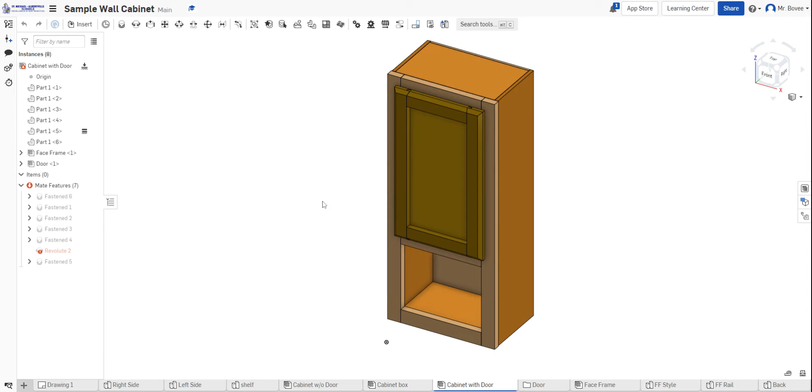Welcome, STMA cabinet makers. This video will show you how to draw the wall cabinet, or at least get started with it. This is the wall cabinet you will build. It's a great little cabinet that can hang on a wall in a bathroom, bedroom, garage, or entryway, and store some of your coolest and most treasured items. So how did we draw this?

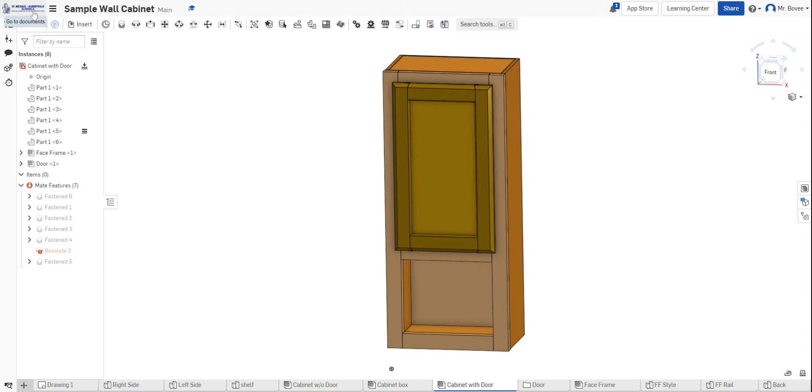Well, first of all, make sure that you already have your STMA account and that you're logged into STMA with your St. Michael-Albertville Schools logo up there. And then simply click on it.

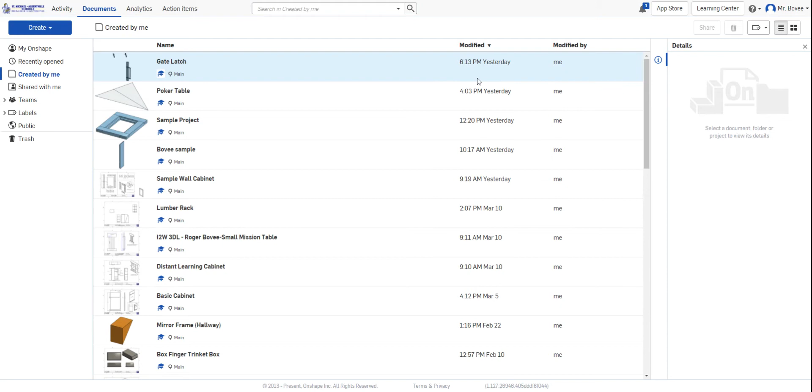Looking for the Documents menu up here, you'll go to Create a New Document. You're only going to do this once for the wall cabinet, so I'm going to name it Wall Cabinet Demo. All right, here comes the project.

When Onshape opens up, you get two little tabs down here. The first one is a Part Studio, which gets you drawing parts. Now you're going to have to access your PDF plans of the wall cabinet.

You're going to be looking for page 2 where they have the sides on there. Let's see here... Nope, all right, sorry, I had a PDF opened and I was going to show you those plans, but you'll be able to find those plans in the Google Classroom where you found this video. So sorry about that little delay there.

All right, so getting started with the wall cabinet. When we get started, we want to start drawing the sides first. And those sides, if we look on the plans, are 7 by 28.

So what we do is we create a sketch, and we get to choose a sketch plane right here. I like to choose one that represents how the part's going to fit in the cabinet. Our sides are going to go up and down, with a left and a right, so I'm going to choose this sketch plane.

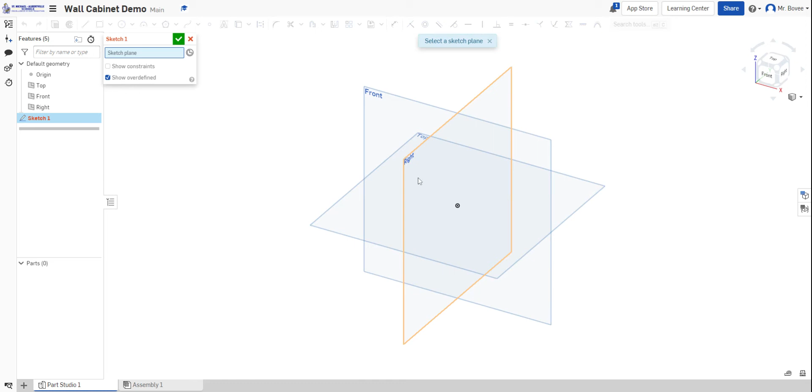It doesn't really matter which one you choose, but it does make it a little bit easier when you get to the assembly stage. I clicked on it, and you'll see I got this little outline. I'll right-click on that and choose View Normal to Sketch Plane.

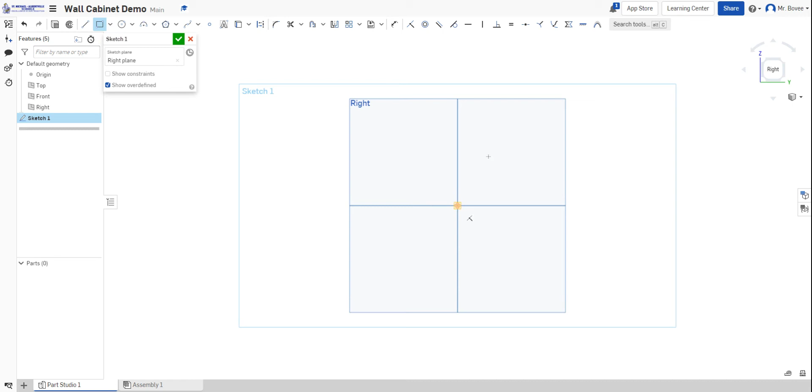Then I'll go up here and grab my rectangle tool. I like to start in the center there, but it doesn't really matter. I'll just draw a rough rectangle with this box around it right here.

That tells me I can put in a number, so I'll go ahead and put in 7 inches and hit Enter, then 28 inches for the height of this piece, and hit Enter as well. So now I've got the rectangle drawn for my side.

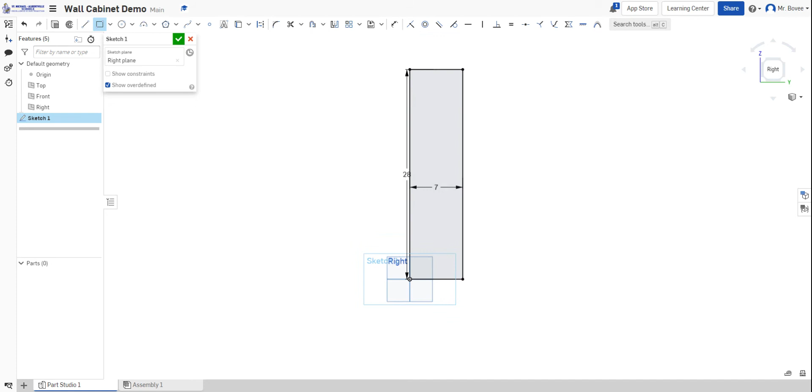I will approve of this sketch by clicking on that green arrow, and I'll grab now the Extrude tool. You'll notice these tools all change, so I'm going to go grab the Extrude tool.

I'll click on this rectangle, and I want to rotate it a little bit so you can kind of see what I am doing here. By clicking on it, you can see it got a little thickness to it, and it happens to be a 1-inch thickness.

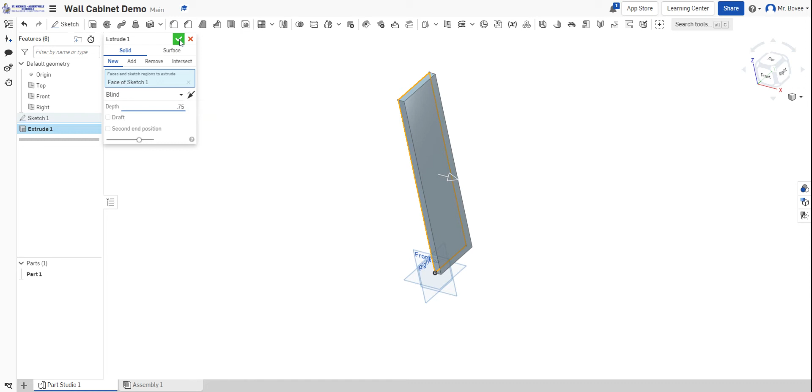I want you to type in 0.75 because it's going to be plywood, and that is the thickness of plywood, 3/4 of an inch. Okay, so there is our piece of plywood.

Now it's time to start putting in the dados where the shelves are going to go. So what we need to do is create another sketch. We'll go up here to Sketch, and we are going to click on this surface because that's where we want to draw.

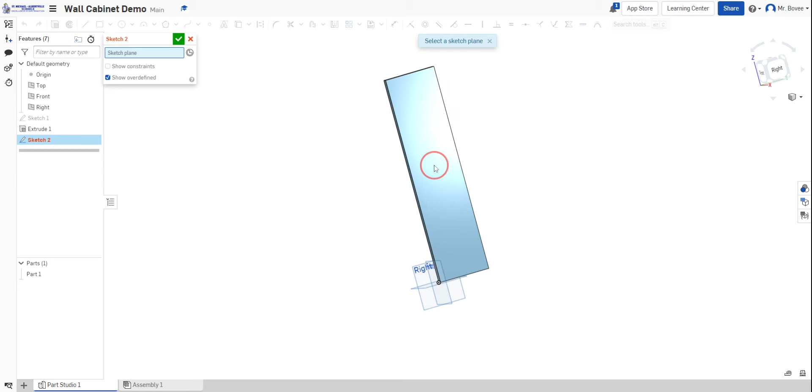So we click on that surface, and you'll see that another sketch plane shows up. I'm going to right-click on that and go View Normal to Sketch Plane. Now I'm going to start drawing on that surface.

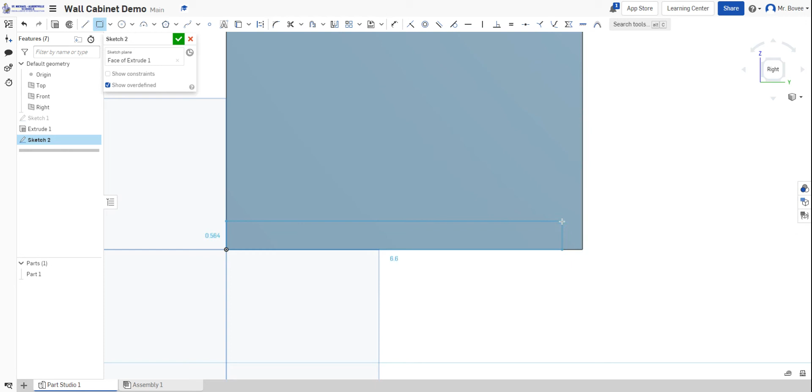I'm going to use my rectangle tool, and I want you to watch closely here—this is going to save you a headache. I'm going to click on this corner, and it's natural to go all the way over to the edge, which is what we'll want in the end. But for some reason, Onshape creates an error when you do that, so don't. Just draw a rectangle right here and click.

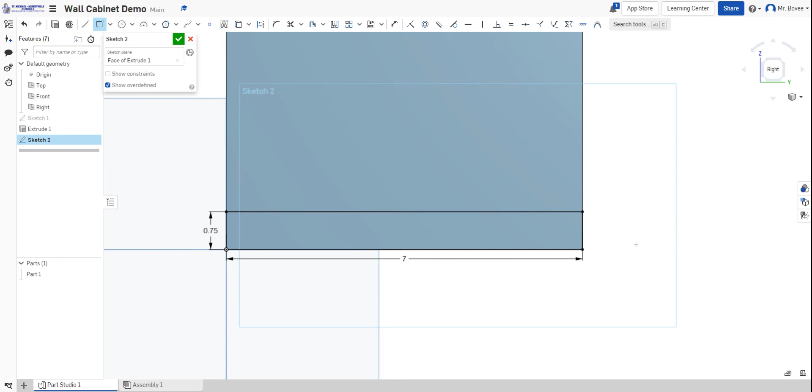Now I know this line is 7 inches, so I'll type in 7 inches and hit Enter. Then this is going to be 3/4 of an inch, so 0.75, and I'll hit Enter. Again, we could have sketched that rectangle all the way to the edge, but it would have given us an error, so by doing it this way, we avoid that.

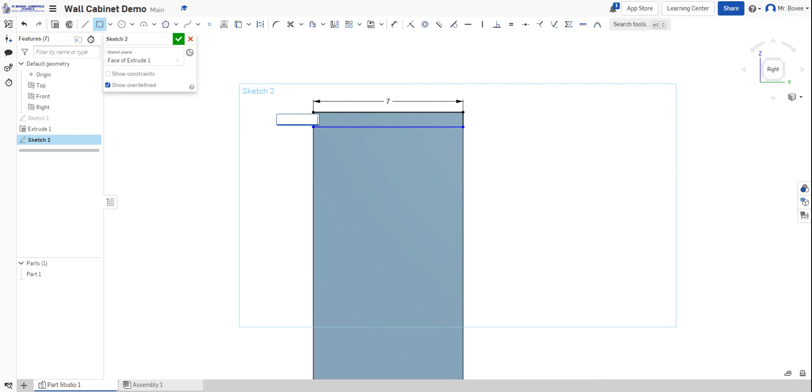Now we're going to put one similar up here on top. I'll do the exact same thing—grab my rectangle tool, grab that corner, and sketch a rectangle. Type in 7, hit enter, type in 0.75, hit enter, and I've got that rectangle. Now I've got to draw another rectangle right in here.

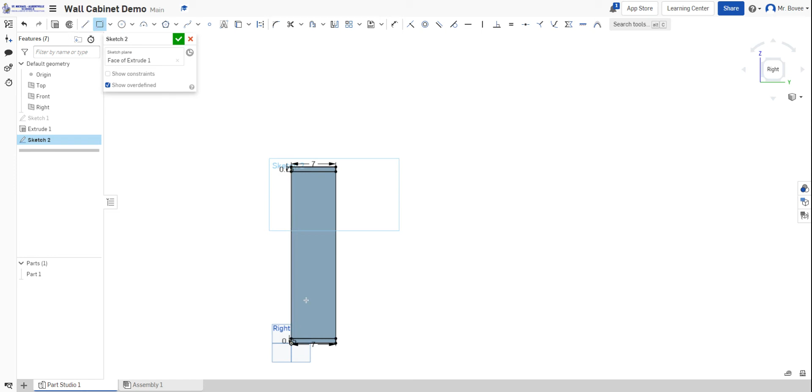So I want to share with you, where do we draw that? Well, we have to come up 9 inches from the bottom here. What we need to do is draw a line up here to give us a point to start that rectangle. Or, you know what else we can do? Let's do it this way—sorry, I just got this idea.

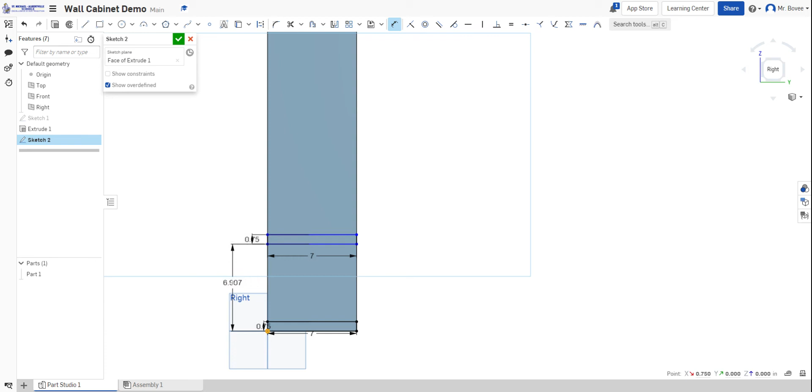We're going to use our rectangle tool and draw our rectangle just like before, making it 7, hit enter, then 0.75, hit enter. Now what we need is for this dot to be 9 inches from that dot right there. We're going to grab this dimension tool, click on that dot, click on that dot, pull the dimension out here where I can read it easily, and type in 9 inches. There we go, 9 inches, just like that.

So now I've got my piece right there—I've got my 3 rectangles drawn, and now I'm going to extrude those. But I want to take material away. This is 3/4 of an inch thick, and we want to go halfway. What is half of 3/4? The answer is 3/8, so we want to go 3/8 of an inch into the board.

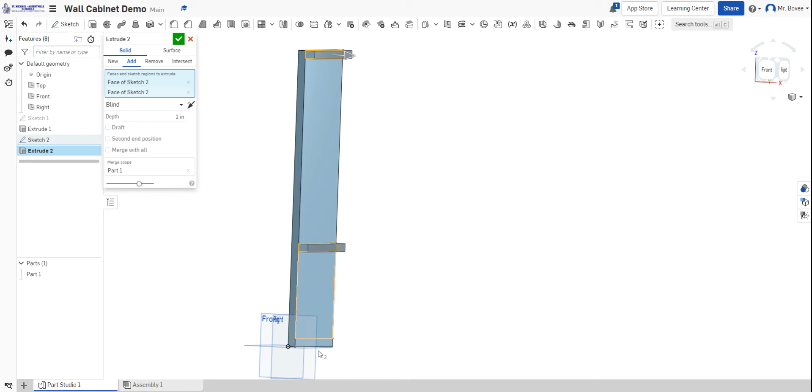I'm going to click on each of these rectangles, and you'll notice they extrude out 1 inch—well, I've got to fix that. I'm going to type in 3/8 of an inch, which I can do as 3 divided by 8, or you can do the decimal, which is 0.375.

Next I'm going to hit remove up here, and you'll notice now they cut the little rabbets out. Just a little fun fact: this is a dado and this is a rabbet, and the only reason that's a rabbet is because it's on the edge of the board, and the only reason that's a dado is because it's in the middle of a board—otherwise they're pretty much the same thing.

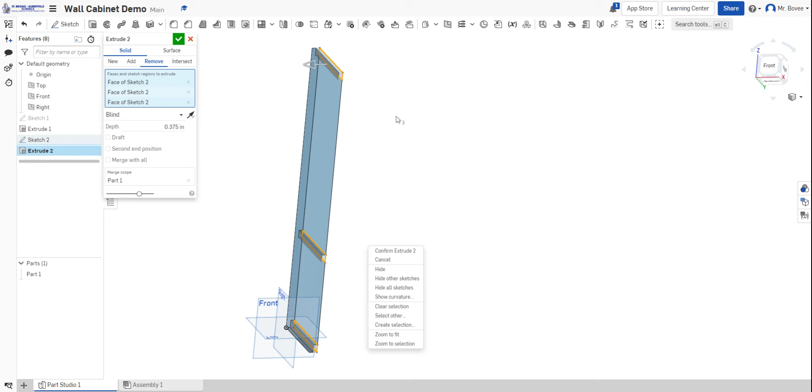All right, so we're done with that. We are going to approve of that extrude. And there we go—now, at the moment, this piece could be a left side or a right side.

When we put the rabbet in the edge, that's when we define it as a left and a right. So here's what I'm going to have you do.

Before we do that, I want to go down to Part Studio 1 and rename that to left side. I'll click out of there, then save us some time by right clicking on it and duplicating it. What do you think we're going to call this one? That's right, we're going to call it the right side. So we'll right click, rename it, and call it right side.

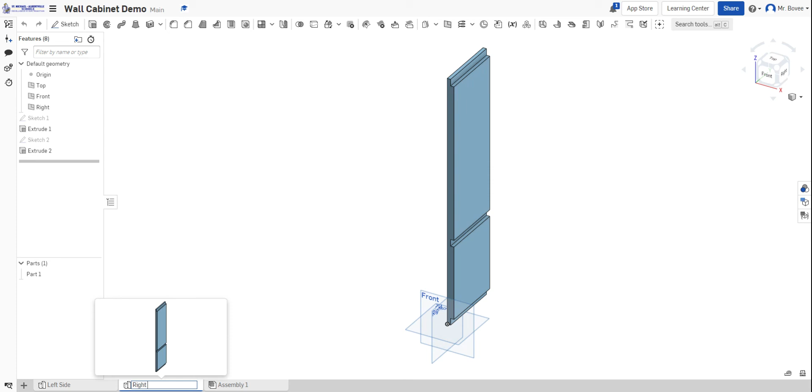Since this is the right side, we are going to work on it. If you get them wrong it doesn't really matter in terms of labeling, as long as one is a right side and one is a left side. But we're going to put a little rabbet right down this edge here.

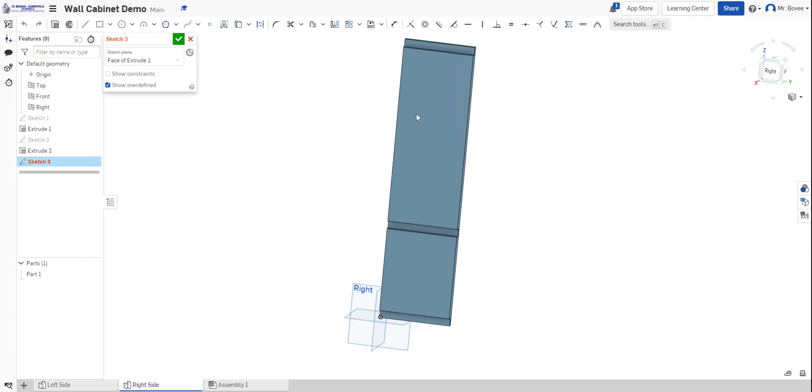So we have to create a new sketch. We'll come over here, click on sketch, click on this plane right here, and there we go. We'll right click, go view normal to sketch plane. I'm going to grab my rectangle tool and come along here and grab that, going all the way down here.

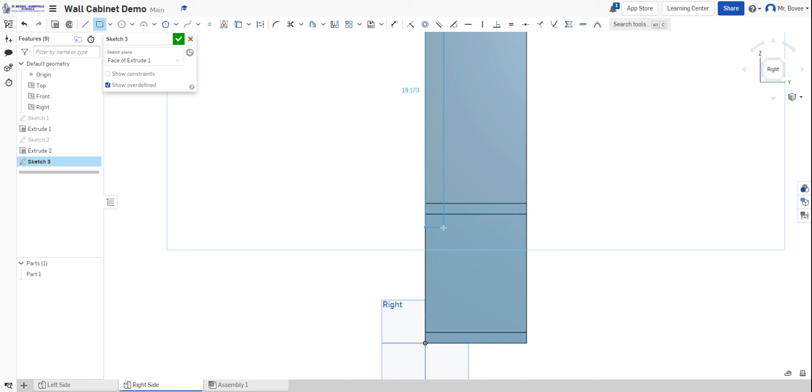I don't want to click on that line, but I do want to make note of that number. Look at that number right there - it's 26.5. Okay, 26.5. I'm going to go ahead and just draw my rectangle like I did before, type in 26.5, and hit enter.

And in this case I want to come in 3/8 of an inch, so I can type in 0.375 and hit enter. And now I have a rectangle that's going along the back side there.

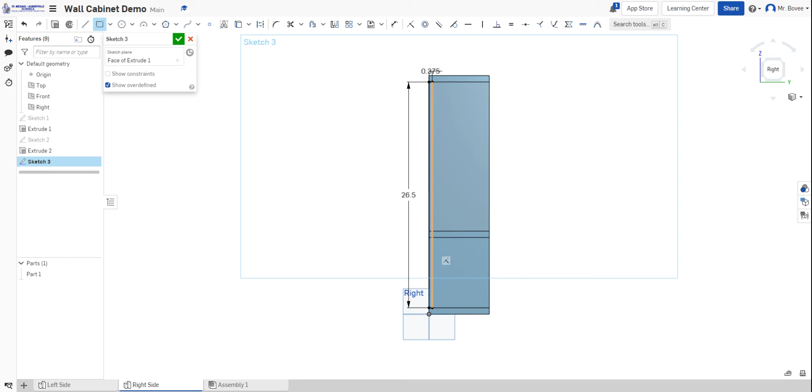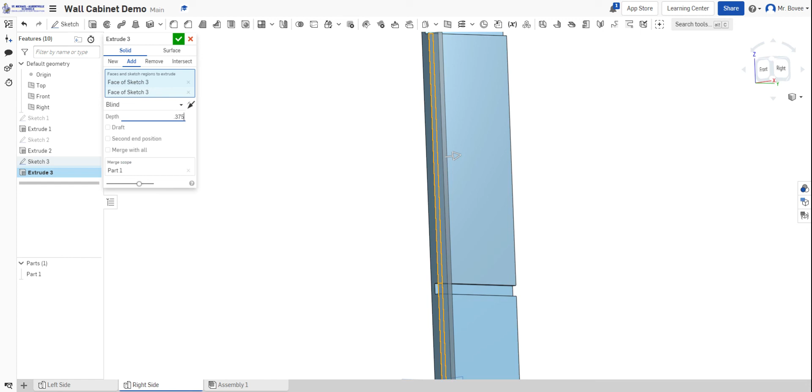We'll go ahead and click on the sketch, and then we just need to extrude that again like we did the others. So we come along here, extrude, click on that and click on that, and we'll change this to 3/8, 0.375, and hit remove. And there we go - now we have it, let's approve of that.

That's what you're going to do in real life too, by the way. You're going to cut these rabbets and dados first, and then you're going to cut this back edge on your piece - and that's after you cut it 7 by 28.

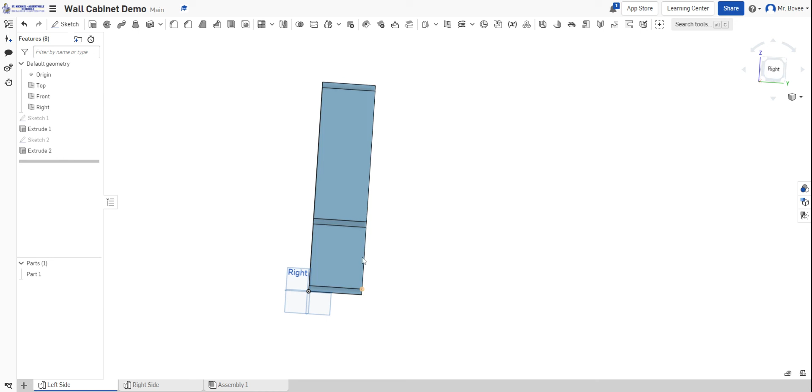All right, let's go ahead and finish this left side. I'm just going to go ahead and put one more rabbet right along the edge here, and then my video is going to be done. So if you picked up on that, you can go right ahead and quit this video.

But here I go. I'm going to click on this plane with a new sketch. I'm going to right click and go View Normal to Sketch Plane. Grab my rectangle tool, and I'm going to draw a sketch rectangle.

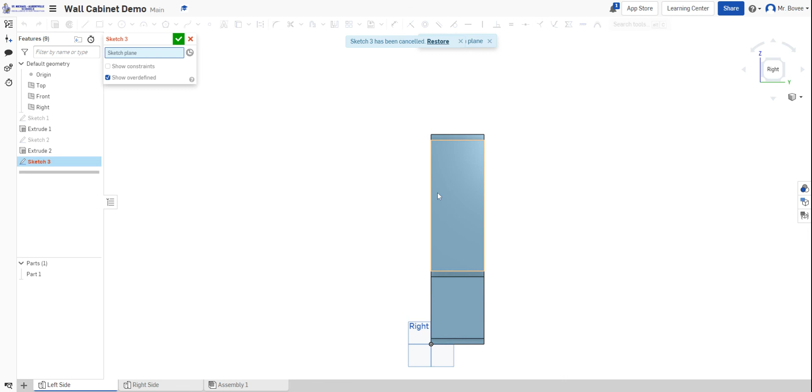We know that it's 26.5, so I'll change - oops, I had my rectangle tool chosen, so I'm going to get out of there, and oh, I got to restart again. Oh dang it, hit the sketch and get my rectangle tool. All right, that's 3/8, and 26.5, enter. There we go.

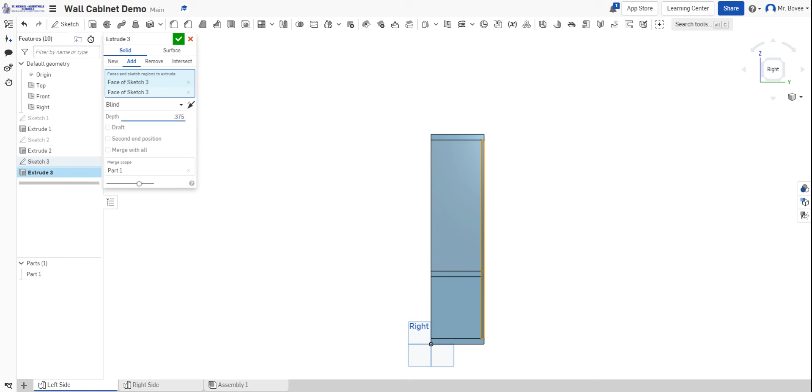And now I need to extrude those. We're going to go 0.375, and we're going to remove. There we go, and we hit approve. There we go, ladies and gentlemen.

Now we have a left side and a right side. All right, come back and check the video out for making the shelves that go in here, and we'll get started with the assembly after we draw the shelves. That's video number 1 for you on the wall cabinet.